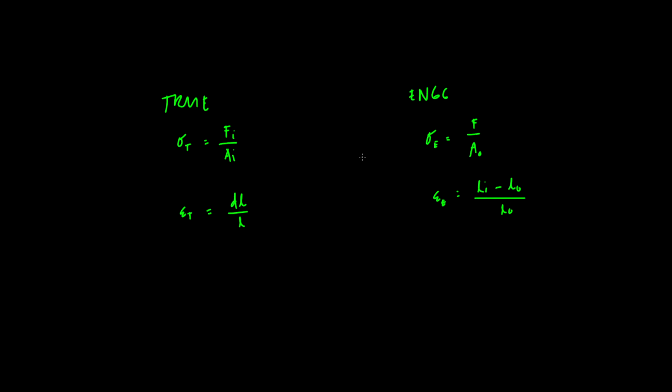So I won't show the derivation, but these two are actually related. If we do the calculations, you'll find that the relationship between the two is: sigma true is equal to sigma engineering multiplied by 1 plus epsilon engineering. Then true strain is equal to ln of 1 plus engineering strain.

I can probably leave this as an assignment for you guys - it's not a recorded assignment, just something to practice on. Try to derive the true strain from our engineering strain, and true stress and strains from the engineering stress and strains. Okay?

So, one thing to note about this, these true stresses... It's noisy outside. What's going on out there? Okay, anyway.

Our true strain or true stresses cannot predict past the necking point. Remember that the model breaks down past the necking point. This necking point is when we have maximum load, right?

So what this means is, if we look at a stress-strain diagram - let's say our stress-strain diagram looks like this.

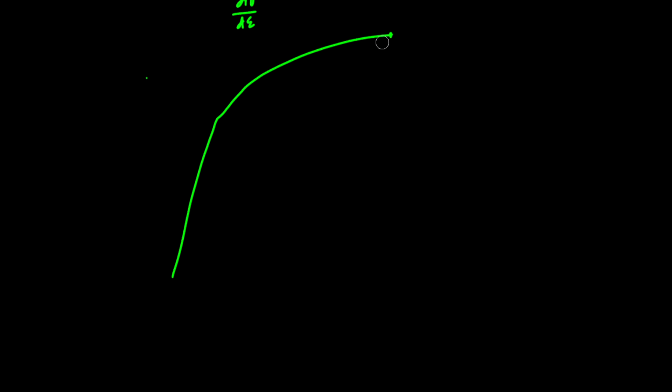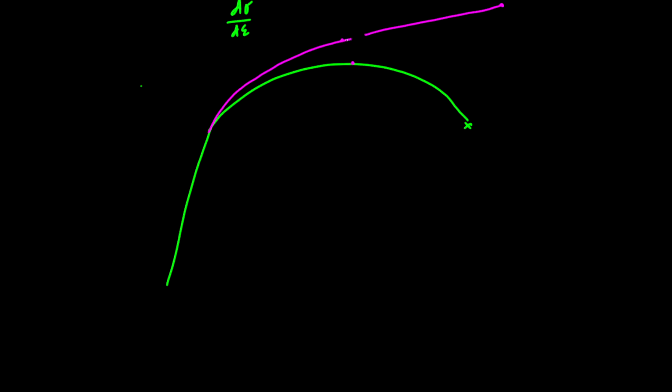So we have this, drawing our true strain, which is a straight path. At this point, on the true curve, it's probably somewhere here - that's what it would look like.

At this particular point, we're saying that whenever the slope - imagine each point here has a slope - we can take an instantaneous slope by measuring the infinitesimal change in sigma over the infinitesimal change in epsilon. It's like saying dy over dx.

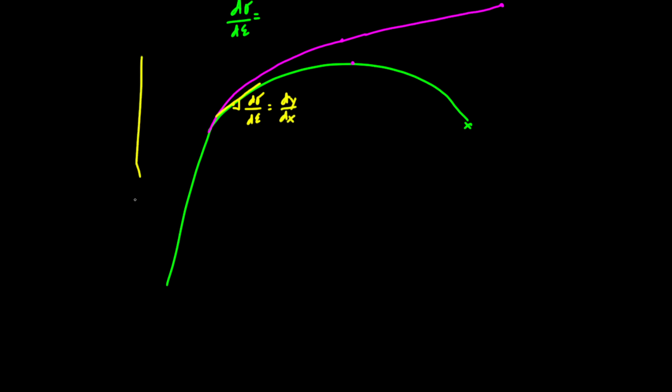When we do stress-strain diagrams, we are actually measuring sigma versus epsilon - this is our y-axis, this is our x-axis. So if you take d sigma over d epsilon, that is saying this is the slope.

Whenever we have a condition where the slope is now equal to the recorded stress, using the true values, then we have the maximum point of loading. So that's how we get here - now, how do we derive this?

It starts off with, let's say, we have a force. This graph is actually a force versus strain, or force versus change in length graph. Force is equal to stress multiplied by area. Because if we go back, stress equals force over area, therefore force equals stress times area.

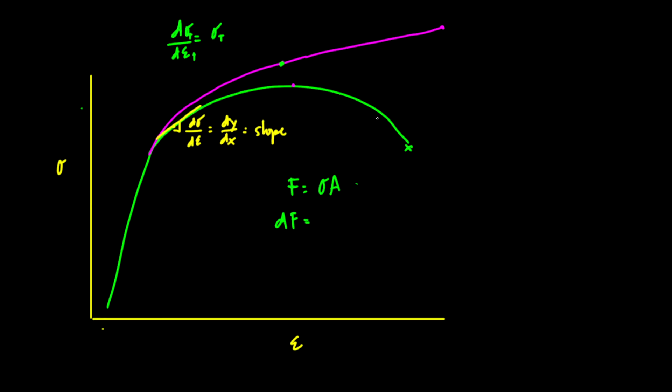Stress sigma times area. So if you get df, if you want to maximize to get the point of maximum loading, we do df equals d(sigma a). And we equate this to 0. Why do we equate this to 0? Because that's how we get the maximum. If we get df equal to 0, that is the optimization or getting the maxima of a particular function. So if you get that, this becomes d(sigma a), or a d sigma plus sigma dA. This is an important relationship, class.

So what this means is, as you progress in the plastic deformation, you are saying that the decrease in load bearing capacity of a material is because of the reduction. This part is saying that the load bearing capacity of a material decreases because the area is getting smaller, since there is a changing area as you progress towards the plastic deformation region.

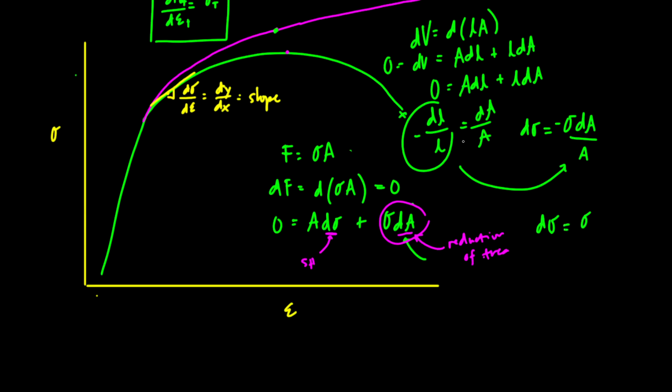So dV, and since we're saying the volume is constant, dV is equal to 0. So we have 0 is equal to A dL plus L dA. And if we rearrange the terms, we get A dL over L, negative, is equal to dA over A. So we just substitute this value here. So we get d sigma is equal to negative sigma - the negative gets cancelled because this is negative - is equal to dL over L.

And if you remember, this dL over L is the equation for epsilon - we said that true epsilon is equal to dL over L. So it's the instantaneous change in length. So we get d sigma, let's replace this with d epsilon. Sorry, d epsilon is equal to dL over L. So we get...

And this is one of the keys, class. If you want to solve the relationship between engineering and true values, this is what you'll use. So this becomes epsilon T is equal to ln of L, something like that, because if you integrate it... anyway, we won't do that now. So this becomes d epsilon is equal to d sigma over sigma, and we're dealing with true stresses and strains here. That's why it's like that. So that is where the Considère's criterion comes from. Okay, later we'll have an example of how we can use this Considère's criteria.

So the next work hardening equation is an empirical one. This is something we discussed a bit when we talked about strengthening mechanisms of metals. We touched on this equation briefly, saying that the amount of stress needed to continually deform a material, known as flow stress, no?

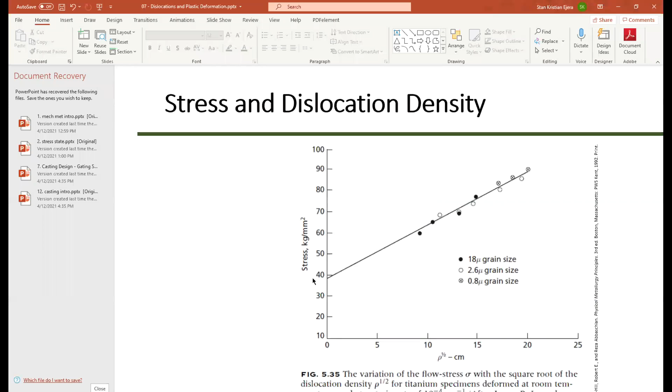Wait, something seems wrong. There should be two equations, so let me do two. This one is specifically the tau, the shear stress. But we also have an equation that deals with sigma, let me just copy this.

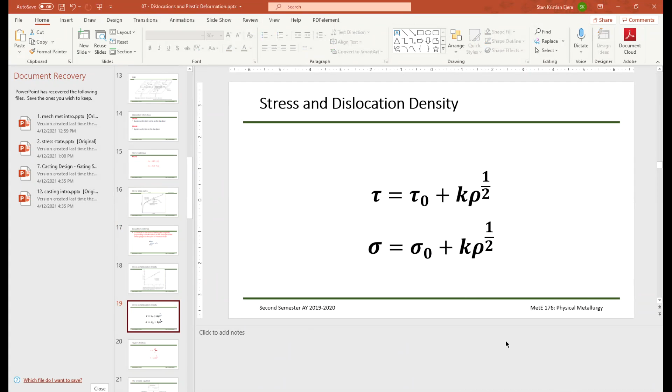So again, this is an empirical equation which from experimentation we got the relationship between stress and dislocation density, and it appears like this. Notice that sigma naught and k, in both cases, k is just equal to the slope of the line. So if you get the slope of this line, that's equal to k. Then if you extrapolate it to zero dislocation density, that will be our sigma naught and tau naught.

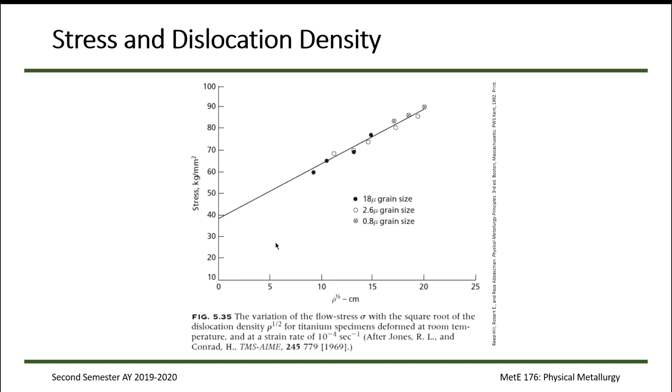So we can show it this way using sigma, but it's more appropriate to use tau, because when we talk about stresses, what usually causes slipping in terms of plastic deformation is always caused by slipping, and slipping is associated with shear stresses rather than normal stresses. So that's why it's more appropriate to use tau. Usually when it's shear stress we give it the symbol tau, and when it's normal stress it's sigma.

Although sigma is a general term, it can also mean tau or shear. Sometimes in some textbooks, instead of using sigma or tau, they write sigma-shear. But it's just a matter of convention.

So what this is saying is if your dislocation density increases, then your resistance to further plastic deformation also increases, or the stress requirement for you to continuously plastically deform your material increases. And again, from our strengthening mechanism discussion, we figured out this is because of the resistance of the material to dislocation movement. So the more we resist, or the easier it is to hinder dislocation movement, the higher the resistance to plastic deformation.

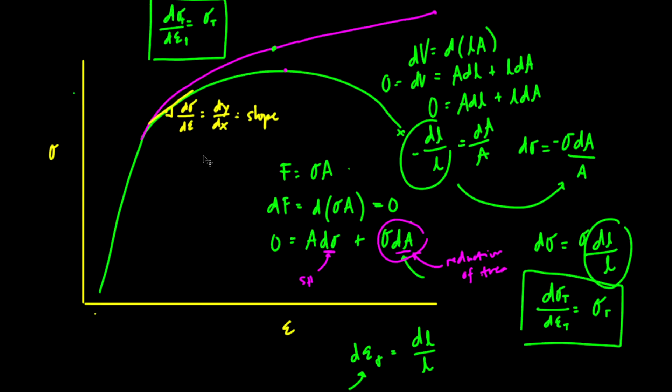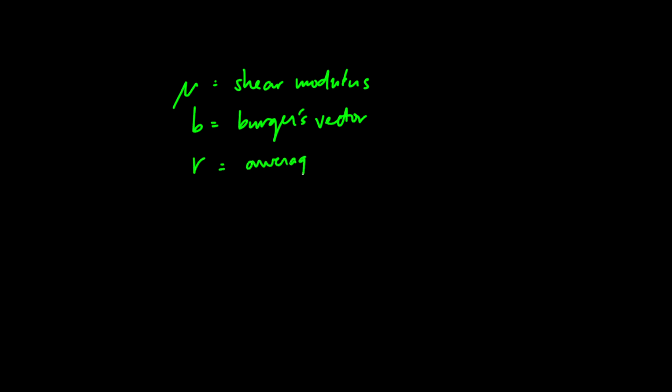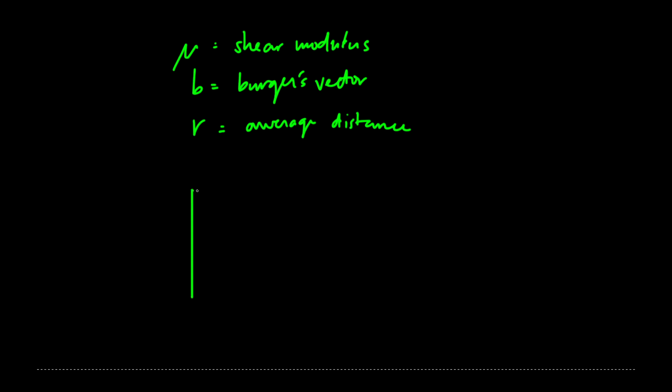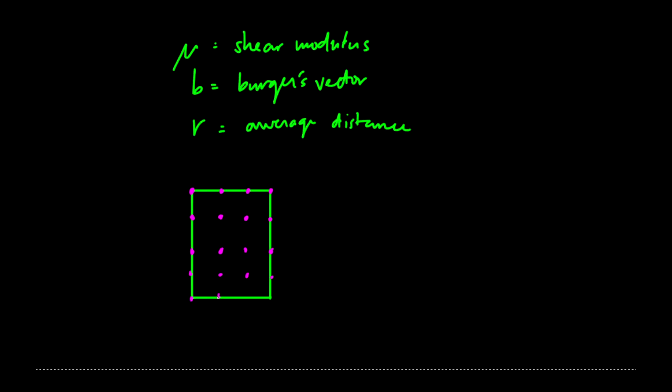Okay, so let's just say na meron tayong grid, para ganyan. And if you want to get the average distance, let's just say na ang Burger's vector natin, dislocations are located uniformly across this area, no? So for example, parang ganyan. Uniform yung displacement niya. So if we say, for example, na ito is 3 units.

Ito is 4 units. Then yung average na number of dislocation within this area is equal to i-count natin yung one side. Let me pull out ko muna yung calculator ko. So, magiging 12 siya.

Pangit pala yung drawing ko. Mas maganda if ang ginawa ko is... sige, okay na to, yan na lang. So, ang gawin ko na lang is eto grid ko para mas ma-imagine natin. Eto na lang yung dislocations natin.

So, equally spaced sila inside the grid, para ganyan lang siya. Kung subukan nating i-count ito, and this is 3 units kunwari, I'm using units para mas general siya - 3 units in size, tapos 4 units in size din siya dito. Then I can say na yung average distance nila is actually just 1 unit, so we can see na tig 1 unit lang yung distance nila.

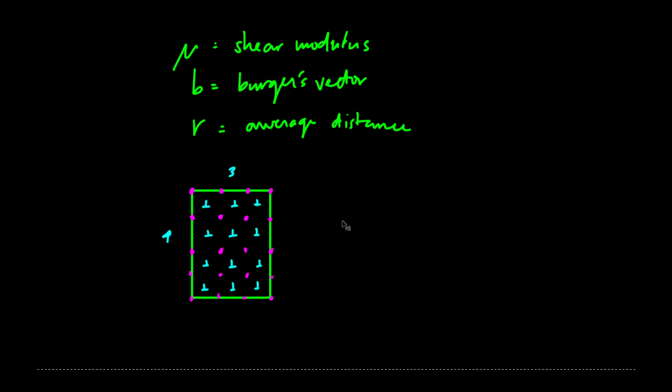Tama? So if you can see here is yung distance na to is 1 unit, tapos ito is also 1 unit. So the average distance between each dislocation is just 1 unit. Tapos if we try to measure the dislocation density, which is the number of dislocations divided by the area, you'll see that there are 1, 2, 3, 4, 5, 6, 7, 8, 9, 10, 11, 12. There are 12 dislocations divided by the area, which is 3 units times 4.

3 units times 4 gives us 12, and therefore we have 1. And if we take the reciprocal, hindi masyadong obvious kasi 1 lang kasi to. Pero if we take the reciprocal of the square root of the densities, this will actually equal the average distance. Average distance of this is equal to r.

So mas makikita siguro natin if we say na tig 2 units to - let's just say 2 units tong each length na to is 2 units. So if that's 2 units, this becomes 6 and this becomes, if that's 1, 2, 3, 4, that becomes 8. So this now becomes our dislocation density is 12 divided by 48. So if we calculate that, 12 over 48, that becomes 0.25.

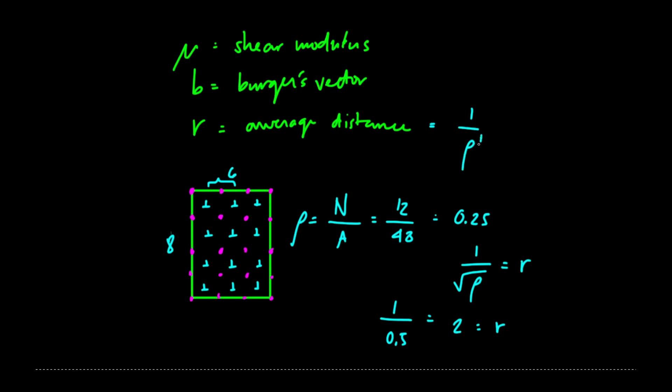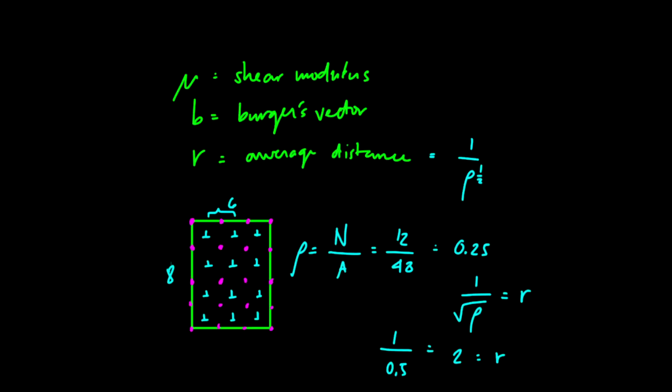So with that said, yung r natin, pwede natin palitan to just equal 1 over the reciprocal of the square root of the dislocation density. So kung babalik tayo sa Taylor's relation, then if we combine all the constants into one constant k, then we get something that looks like this. So that becomes the shear stress is equal to some constant k kasi this is a proportionality - so it's equal to some constant k and nakapasok na dito si shear modulus and plus the Burger's vector.

So mu and b are all incorporated into this constant multiplied by the square root of the dislocation density. Since R is in the denominator, and R is equal to 1 over square root of density, therefore 1 over R is equal to just the square root of the density. So we have Taylor's relation, which has a theoretical basis that agrees with the empirical observations that the shear stress needed is directly proportional to the square root of the dislocation density.

Now, our last topic is the Orowan's equation, and I'm sure you've heard of the Orowan's equation before. Let's try to derive the Orowan's equation.

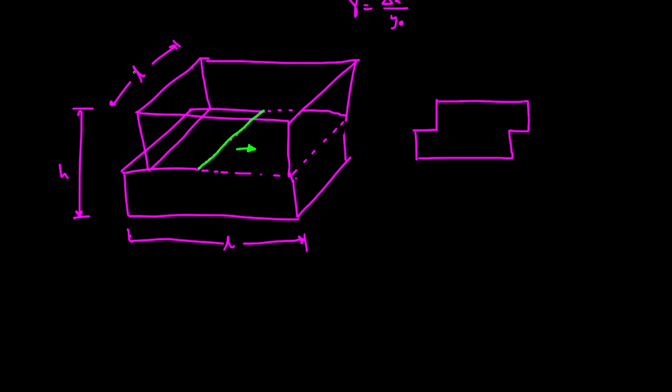Or better yet, to avoid confusion, let's call this x. So we have h, the height, x is the distance that is being traversed by the edge dislocation, and L is the length of the dislocation, which in this case is also the length of the crystal. So what we do is, if we want to compute for the shear strain, we say it's equal to, if it has fully translated to the right side, then it's equal to the change in X, this displacement. So shear strain is measuring this.

How large is the shearing done on this top part relative to the bottom part? The shear stress is the force acting upon the object up top, and it is shearing—it acts on both sides, shearing the upper part and the lower part. This is caused by stresses, and the effect is the movement of the dislocations when we look at it from an internal structure standpoint.

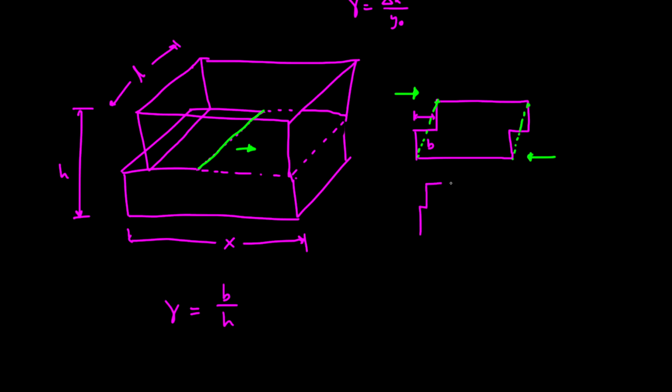That's the shear strain. But let's say, for example, that it hasn't fully translated yet—the edge dislocation is somewhere in the middle still. So it hasn't fully translated. Maybe it's only somewhere around here. If it's only somewhere here, then it hasn't reached the full length B yet. It's only a proportion of the X that it needs to travel, and this can be translated into this diagram.

So it's as if the edge dislocation is still here, not yet fully traversed to this point. Since it hasn't, let's say if it has gone halfway, then this B, or this change in X—if this is your X, and this is change in X—then change in X here is equal to 1/2 of B, because B is when the dislocation reaches 100% of the way.

So if it's 1/4 of the way, then it's equal to 1/4 of B. It's proportional to how far the dislocation has traveled. So if that's the case, then our gamma, if the dislocation is still in motion, is just equal to delta X. The amount of shear strain it produces is delta X over X, meaning it's only a fraction of the Burgers vector divided by H.

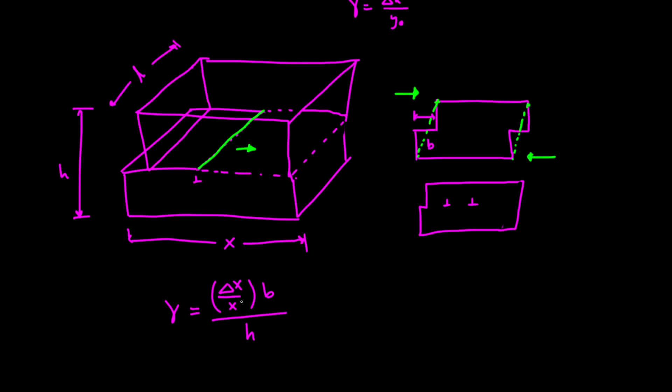So if it's like this, we can say it's equal to delta X times B over X times H. Then we just multiply by width—by the length of the dislocation, which is also the length of this crystal. Then we can say the bottom part is just volume—height times X times length. This is just volume, this term. So this is volume, then delta X times the Burgers vector times length.

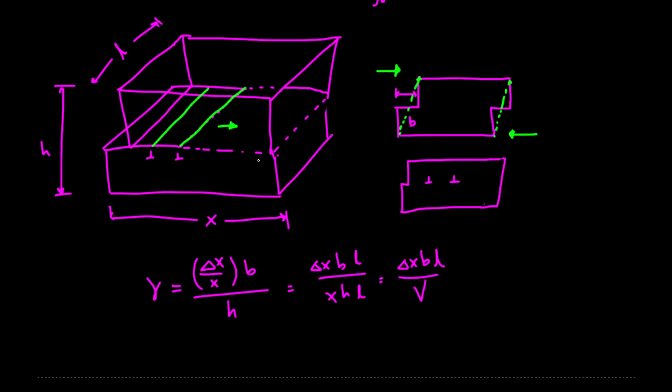Now if we say we have n number of dislocations traveling through—so let's say we have multiple dislocations, like this. If you have a dislocation here, we also have dislocations over here. So if we want to get the total strain, we just multiply this value by the number of dislocations passing through. So the total shear strain is just equal to n times delta X times B times L over volume.

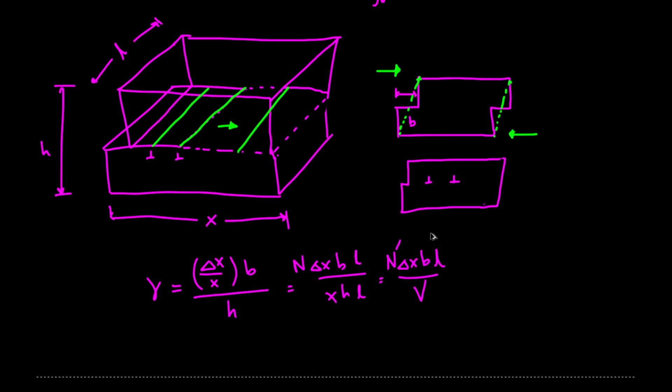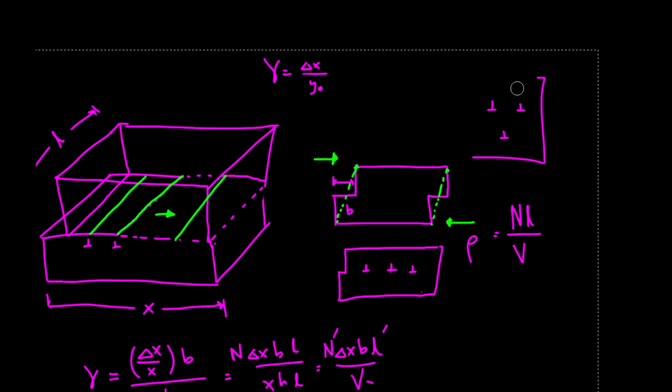There are two ways of measuring densities: dislocation density. You either measure the number of dislocations, like edge dislocations as viewed in a plane. So if you view it from the side, how many dislocations are there over this entire area.

Or you can measure it that way, or you can use the total length of the dislocation. For example, if you have a volume like this, with multiple dislocations, and let's say they're mixed dislocations, so it can have multiple lengths. If you take this total length divided by the overall volume, you also get the dislocation density. So those are two ways of measuring dislocation density.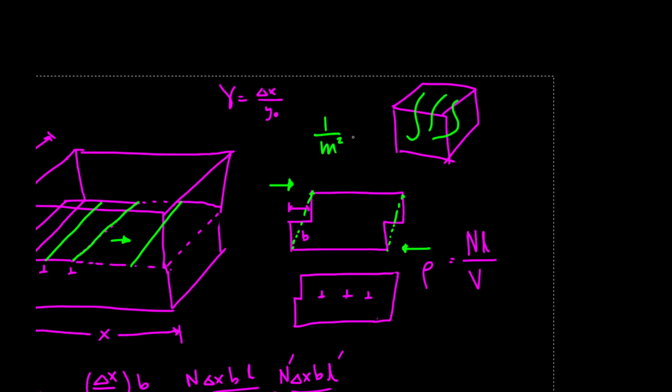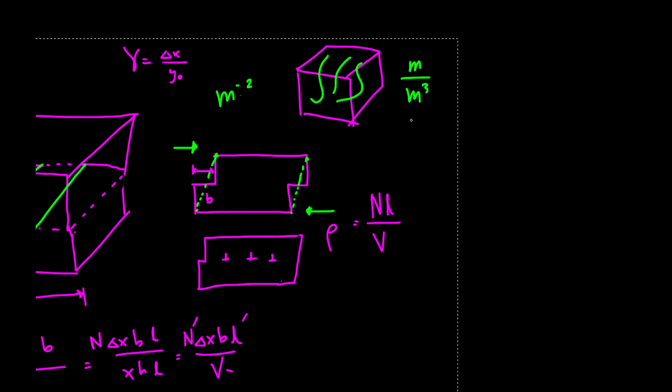Dislocation density will always have the units of 1 over meter squared, or in SI units, meters to the negative 2. So this becomes meter per meter cubed, which is still meter to the negative 2. And if you're measuring the number of dislocations per unit area, that is also 1 over meter squared as the unit.

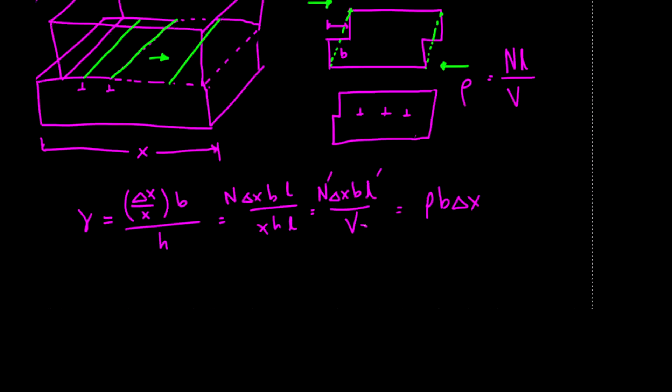So this NL over V is just a measure of dislocation density, so we can substitute that in. It becomes dislocation density times B times delta X. So gamma is equal to rho B delta X. Now what we want to do is divide all terms by T.

If we divide this by time, by a time component, over T, let me extend this a bit. What we finally get is strain rate. This is the amount of shear strain per unit time, so that's actually a strain rate term.

Usually when we talk about rates, the notation is to add a dot over the symbol. So if you see a symbol like this, it means this is shear strain rate. If you see it without the dot, that means it's just shear strain.

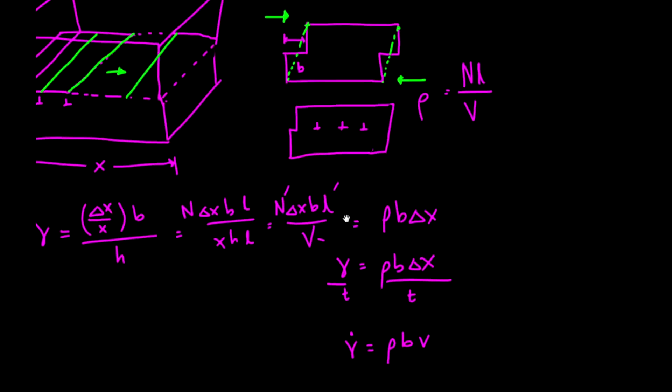So this means shear strain rate is equal to rho B times delta X, which is the distance it travels, divided by the total time it travels. That's actually a measure of velocity — how fast the dislocation is moving, in this case how fast it's moving across the slip plane from left to right.

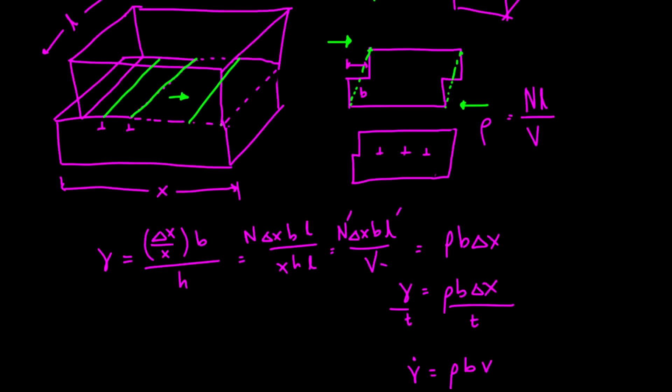So we have the common or well-known equation, Orowan's equation, which is gamma dot is equal to rho B V. That's how you derive that equation.

So what does Orowan's equation say? It states that the dislocation density will affect the strain rate. The higher the dislocation density, the faster the strain rate becomes. And the faster the dislocation travels, the higher the strain rate also becomes.

Strain rates are particularly important when studying plastic deformation. For example, if you are studying the strain hardening effects of a particular metal, it is always important to add to your factors, or at least mention, what strain rate you used, because different strain rates will give you different behaviors in terms of strain hardening.

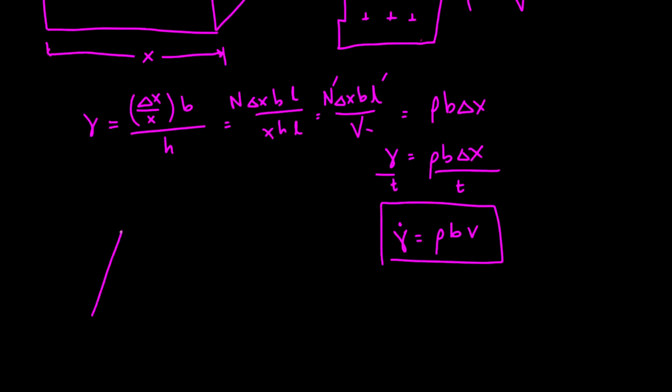You'll usually see this — almost all graphs, if they follow the standard ASTM protocol, will have a stress-strain diagram that states, usually at the bottom, what strain rate was used to generate that graph. And nowadays, especially the newer UTMs with computers and software, you can actually set what strain rate you want.

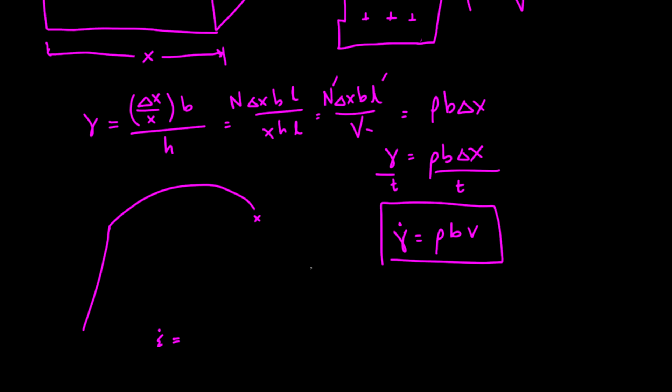So this is a whole field you can get into, and it's actually one of my research interests — the effect of strain rate in relation to strain hardening is an interesting field. If you're into physical metallurgy, this can be one of the thesis topics you could pursue once you're doing research. So that's for Orowan's equation.

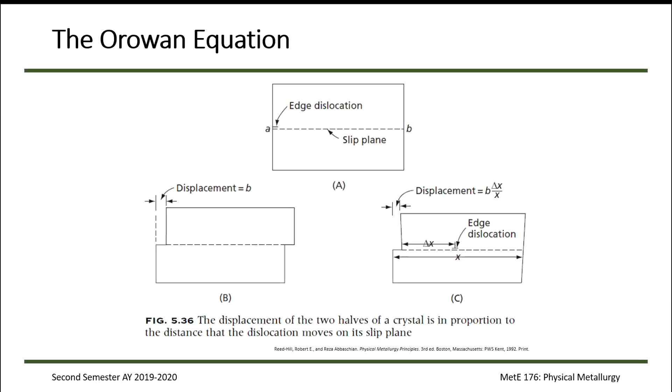Let's go back to the slide. If we do the calculation, we should end up with something that looks like sigma equals rho B V times strain rate, as I mentioned. But once you can approximate the shear strain rate, or the linear strain rate, with this equation—

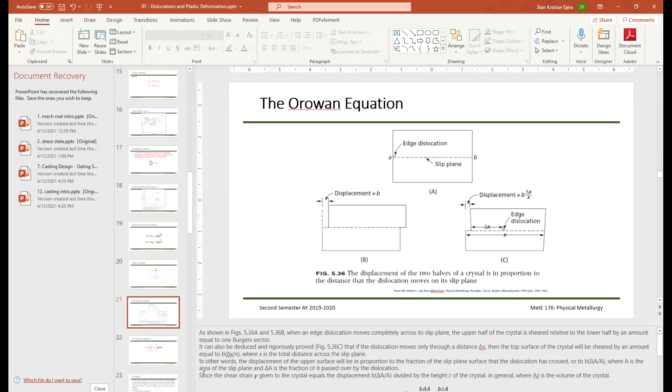Half of the shear strain rate is equal to... wait, there's a term here. What is the term? The Schmid orientation factor, that's what it's called.

The Schmid orientation factor states that our linear strain rate is equal to just half of the shear strain rate. So if we plug this into the equation, we end up with epsilon, the linear strain rate, equal to 1/2 of rho B V. And that is your Orowan's equation.

Okay, so that's our final form. So let's do some examples, no?

Let's try this. Number 1: a tensile test was made on a specimen that had a cylindrical gauge section with a diameter of 10 millimeters and a length of 40 millimeters. After fracture, the total length of the gauge section was found to be 50 millimeters, and the reduction in area is 90%. The load at fracture is 1,000 newtons.

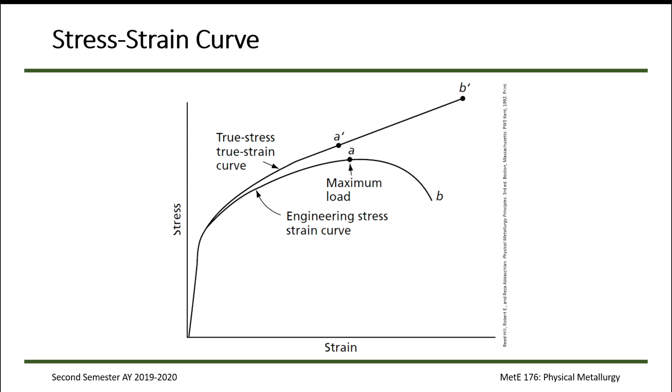Okay, so if we were given the graph instead of the exact value, we can still extrapolate or interpolate it. Just take this point B, where it hits the y-axis—that is your stress at fracture. So we get the stress at fracture, divided by—we get the force needed at fracture—

then divided by A naught, we get the engineering stress. Although in that graph, it's automatically already engineering stress, so you don't need to divide by A naught.

Okay, so that's 1,000. The problem says the gauge length and gauge diameter of the specimen is 10 millimeters. So that's if you do pi over 4 times d squared, or what was done here is pi r squared.

So that's pi over, times (5 times 10 to the negative 3 meters), giving us this value in pascals. Or what you can do is express it in millimeters—if Newtons is divided by millimeters squared, it automatically becomes megapascals. So that's a shortcut you can do, class: express the area in the denominator as millimeters, and the result will be a megapascal value.

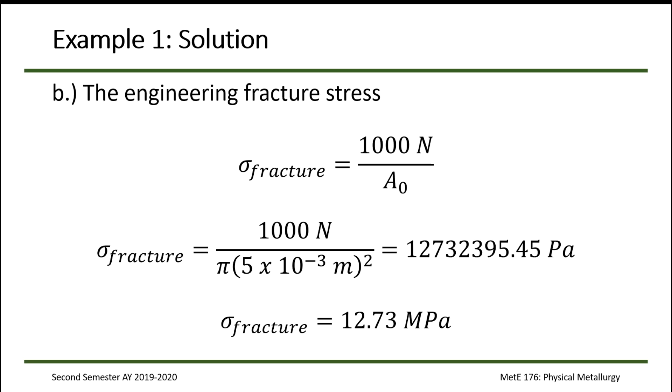Hindi na, okay na yun. So, next nating isosolve is itong true fracture stress, ignoring the correction for triaxiality at the neck. Again, that's just added for accuracy, no? So, true fracture is equal to the instantaneous, pagka true stress yung kinocompute natin, we always take the instantaneous na area instead of the initial area, no?

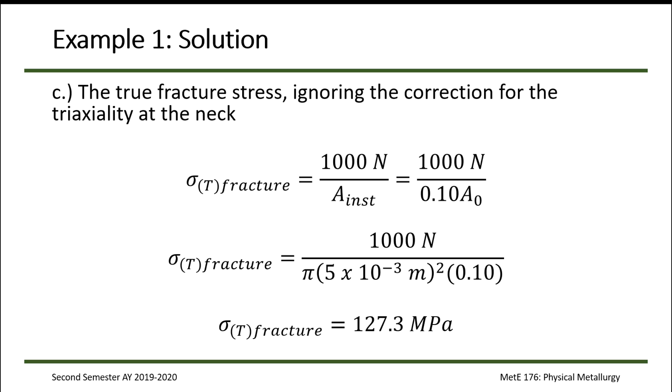So, we have 1,000 divided by yung instantaneous natin na area, and based on the problem, meron daw reduction in area by 90%. Therefore, yung final area natin is just equal to 10% of the original area. So, if we multiply it by 0.1 dun sa baba, so we have 0.1 times the initial area, we should get 127.3 megapascals. So yun yung magiging, it's actually 10 times more than the engineering na stress, no? Yung magiging true stress value natin at fracture.

So, true straining at the neck is equal to, again, ito siya, magiging ln L over L naught siya. So, hindi ko pala napakita to na maayos, no? So, let me just balikan natin to. So, we remember that yung d epsilon natin is equal to dl over L.

Okay? So, if you want to take the integral, kung i-integrate natin to, magiging epsilon is equal to ln L evaluated from L naught to instantaneous length, which will give us ln Li minus ln L naught, which is, kung i-simplify mo, gives us ln of Li over L naught. Okay? So kaya yung formula dito is shown this way, no?

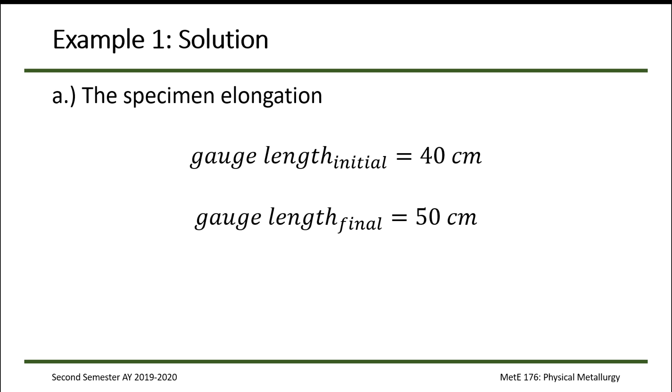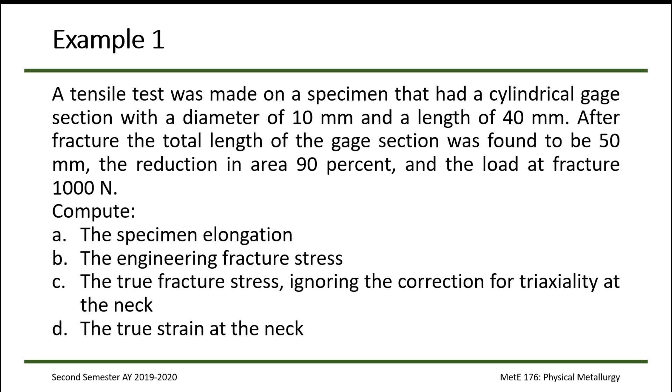So, yun yung medyo kulang dito sa problem, no? Hindi sinabi yung necking conditions. Kung ano yung walang sinabi na length or walang sinabi na area, no? Okay. Pero bakit ang ginamit niya is kinumpute niya actually yung at the fracture, no? Pero ang tinatanong is true strain at the neck, eh. So, kulang yung information class, no, para ma-solve natin dito.

Pero tama naman 'tong equation na ginamit niya, na ang ginamit niya is yung instantaneous length na ginamit niya is yung parang final length na, which is yung 50 when it had fracture. So kaya ang nakalagay dito is the true strain at fracture. So that's the length at the fracture is 50, tapos initial length natin is 40. So if you take ln of 50 over 40 gives us 0.223.

Hindi ko alam, wait lang. Ito na dapat yun, 0.223. Okay? i-review ko to class, no, kung bakit ganito. Pero dapat yung epsilon t natin at fracture should be equal to this value lang, no?

Kinompute niya yung epsilon t at fracture in terms of yung radial, no? Yung kumbaga yung in terms of area. So kaya siya 0.1 over 1 kasi yung ln natin, L over L naught can also be expressed as ln A naught over A, because tulad ng ginawa natin sa continuity equation, no? Ang sabi natin na yung D of volume is equal to, kasi sabi natin D volume is equal to D ng L times A, which is A DL plus L DA.

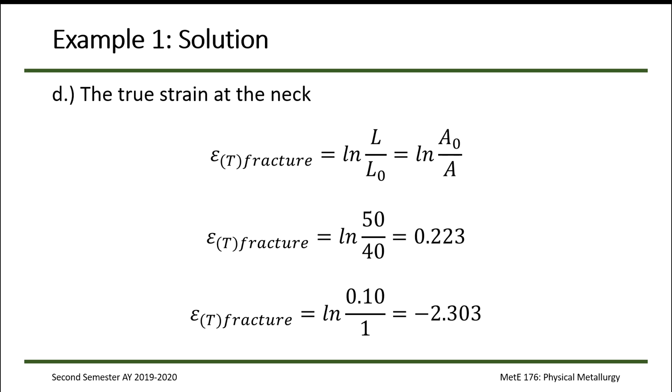This one is a linear na strain, this one is a radial na strain, no. So again, ang kinukuha natin dito is strains at fracture, no? Linear strain at fracture, radial strain at fracture. Pero notice na ang tinatanong sa problem is true strain at the neck, no? So kaya medyo weird tong bakit niya kinuha tong values na to. Pero anyway, okay lang yun. So